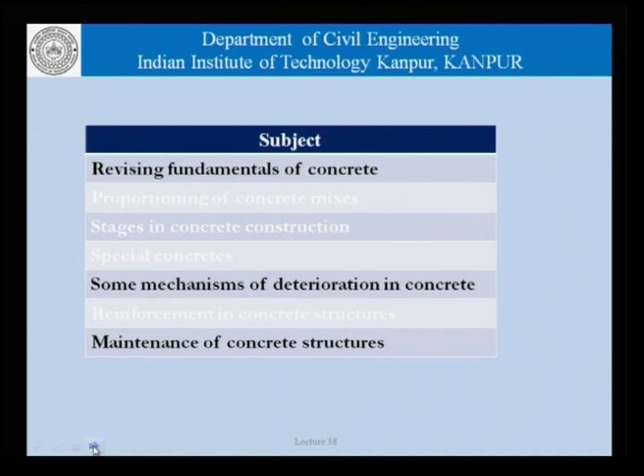We are trying to revise fundamentals of concrete, proportioning of mixes, stages in concrete construction, issues in quality control, talk about special concretes, some mechanisms of deterioration, reinforcement in concrete structures, and maintenance of concrete structures. In the last discussion, we were talking about a subject which spans fundamentals of concrete design, in fact the principles of all structural design as a matter of fact, mechanisms of deterioration in concrete, and maintenance of structures. What we were talking about was a conceptual framework for maintenance and repair of concrete structures.

So to recapitulate what we were trying to do, we had studied or looked at deterioration and performance and how they change over time. So this here is the variation of deterioration. As gradually the structure is in service for a longer and longer time, it deteriorates. Corresponding to that deterioration, the line here shows a change in the performance. Initially the structure performs very well, and as the structure ages, the performance tends to reduce or degrade. Taking these changes in mind, this green line here is the minimum acceptable level of performance, and this red line here is the maximum acceptable level of deterioration.

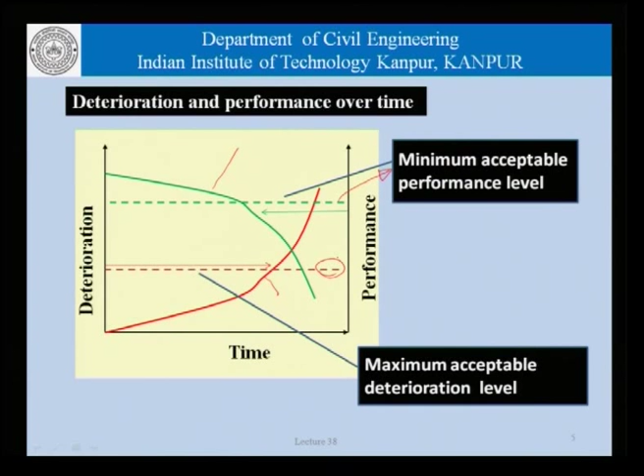And depending on how we want to define the concept of service life, we can say that the service life is reached once either the deterioration exceeds the maximum permissible limit or the performance falls below a critical minimum acceptable level. Now, how do we define these levels? In what quantitative parameters? That is left to us. We could choose parameters such as deflection for performance. We could choose cracking for deterioration, chloride penetration for deterioration, and so on and so forth. So as a concept, this is what we had talked about when we talked about in-service maintenance of concrete structures.

Extending this concept further, we discussed the issue of inspection, which involves determination of the actual state of the structure from the point of view of either deterioration or performance. So once the structure is put in service or just before it is put in service, there is an initial inspection followed by periodic inspections, and at the end of which we need to carry out an evaluation process and decide what we want to do, either reinforce the structure or at the end of any stage we can decide to repair the structure. This could be followed by a detailed inspection, which again could lead to a repair or a reinforcement. And at the end of this cycle, once we have carried out a repair or a rehabilitation, we really go back to an initial inspection and see whether the work that has been carried out is satisfactory and what is the state from which the structure is starting afresh.

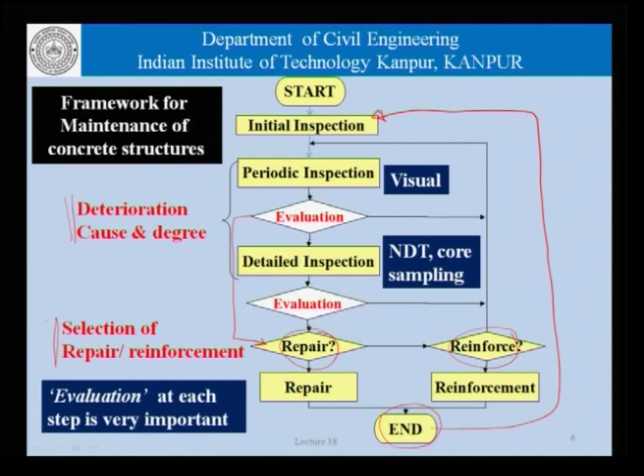While we are talking about this, we also talked about the need to understand deterioration and its causes when we are carrying out inspections, and the importance of selecting repair and reinforcement measures when we are carrying out repair and reinforcement. And of course, the issue of evaluation, which is really a judgment or a decision making process which is involved at different stages to help us determine the next step.

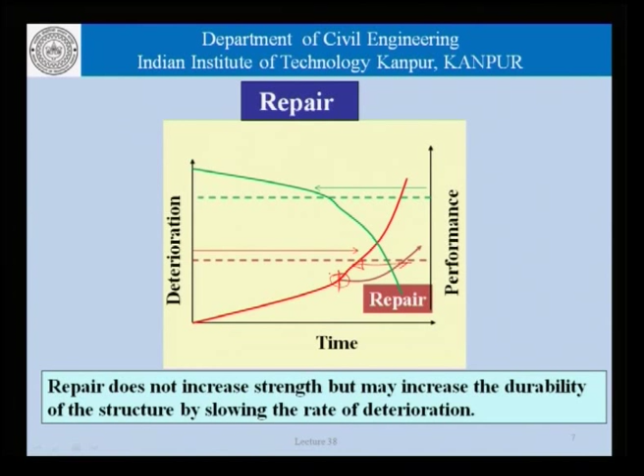Now, carrying this forward, we try to define the concept of repair in terms of a maintenance action which may not increase or improve the existing state of the structure, but increases the service life that is available to us by reducing the rate of deterioration that is occurring at that point in time. So, if we are intervening at this point in the structure, we have increased the service life by reducing the rate of deterioration or rate of further deterioration.

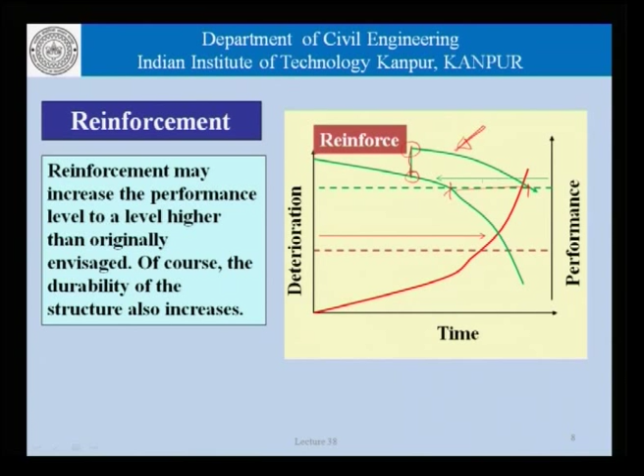Similarly, as far as reinforcement is concerned, if we are intervening at this point in time, we may actually improve the performance at that point in time, and how this graph, that is the post reinforcement change in the performance, goes would depend on the nature and the efficiency of the reinforcement work. So, we have increased the service life from this point to this point because of reinforcement action. So, this is what we had talked about last time. We had discussed in some detail the causes for repair and reinforcement action, considering a simply supported beam like this. One of them could be increase in the load level, which in civil engineering structures could arise out of changes in the axle load, the frequency of loads and so on.

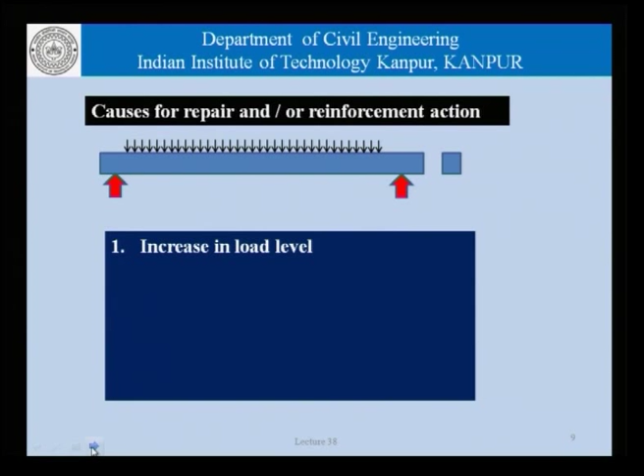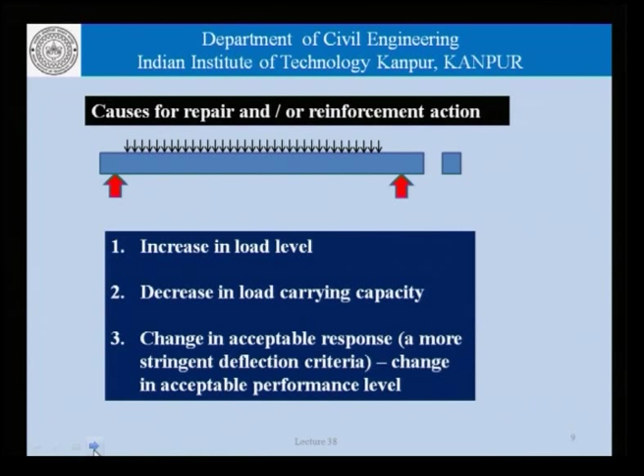It could be in the decrease of the load carrying capacity of the member or the structure, which is how the deterioration in properties of the material manifests itself. And there could be changes in the acceptable response or the change in the design criteria, acceptable deflections, for example, changes in the load factors and so on.

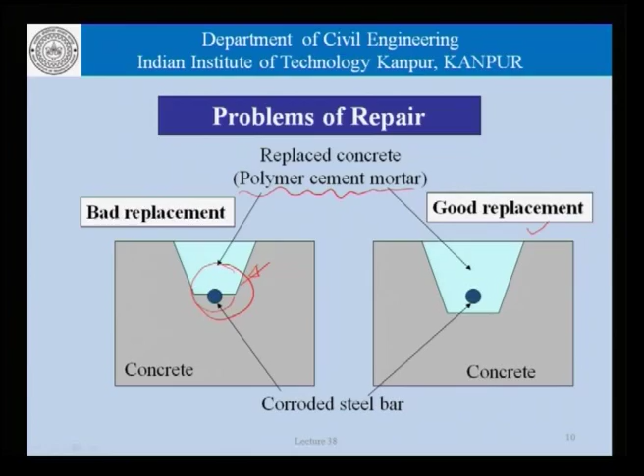We had talked about some problems in repair. We had talked about a bad repair, in which case we had seen that the repair material, for example, polymer cement mortar, is placed in a structure like this without removing all the concrete from behind the deteriorated reinforcement bar, which is what is done here as a good replacement. And a repair action of this nature does not necessarily mean that the structure will not corrode in the future. So, the corrosion or such a problem could manifest itself very quickly after the repair work has been carried out if the work is not done properly.

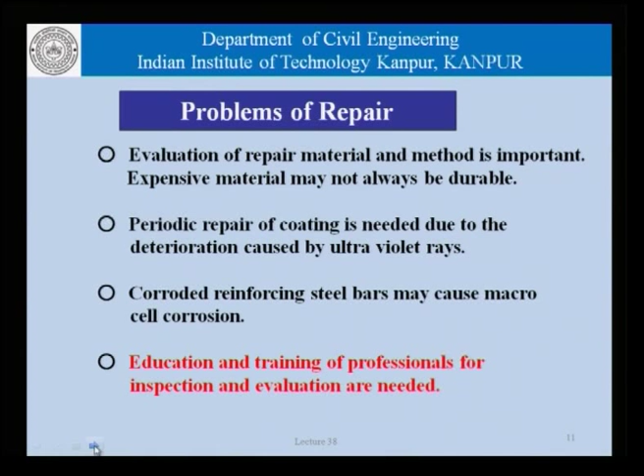We had talked about the need to evaluate repair material and the method. It is not necessary that expensive materials are always more durable. We had talked about periodic repair of coatings, because those coatings could be deteriorated or could lose their effectiveness on account of deterioration by exposure to ultraviolet rays. In cases of corrosion, we have to be careful about macrocell corrosion being initiated, and we have talked about macrocell corrosion when we were talking about deterioration in concrete structures on account of reinforcement corrosion, and the need for education and training of professionals for inspection and evaluation of concrete structures, which is a professional job. It just cannot be done in an ad hoc manner.

So, now coming to what we will talk about today, we will really focus on some of the common methods of repair and reinforcement, and we will quickly run through some results from a laboratory study on repair methods and their efficiency. Now, coming to some of the common methods of repair and rehabilitation, the discussion here is more in terms of introducing the repair methods rather than going into the details of each of these methods. And I would like the listeners and the students who are interested in this subject to actually go through the net and some of the available literature which describes each of these processes in much greater detail, and that perhaps is not required when we are talking about the general principles of repair and reinforcement of concrete structures, that too within a framework of operational maintenance and so on.

Now, the first such method that we talk about is the dry pack and epoxy bonded dry pack. What is done here is that we have a portion of the structure which needs to be repaired. So, what we put in place is a restraining formwork, and we try to pack the repair material in layers. So, we put this layer first, followed by another layer after that, and so on, and this compaction is carried out using a hammer. So, that is the manual method for placing, compacting and ensuring that this part of concrete which had been removed or which had to be removed on account of some reason is now replaced by another

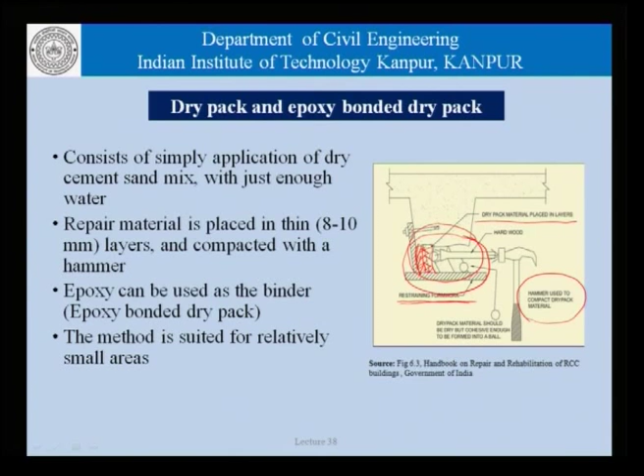The advantage of this method compared to using simply concrete to begin with would be that we do not really need to compact the concrete. It can be done in sections where concrete cannot be placed and compacted. So, we can use coarse aggregate, fill that space with coarse aggregate, and add the grout later on.

There are basic differences between pre-placed aggregate concrete and normal concrete. The way pre-placed aggregate concrete has been done, as you know, would involve aggregate to aggregate contact, which is not necessarily true when we are talking about normal concrete constructions. Similarly, the gradation of the aggregates that is used should be such that it allows the movement of cement grouts. We need to determine the properties of the grout that will be suitable for a particular application depending upon the maximum particle size and the particle size distribution, which would essentially control the void geometry of the compacted coarse aggregates.

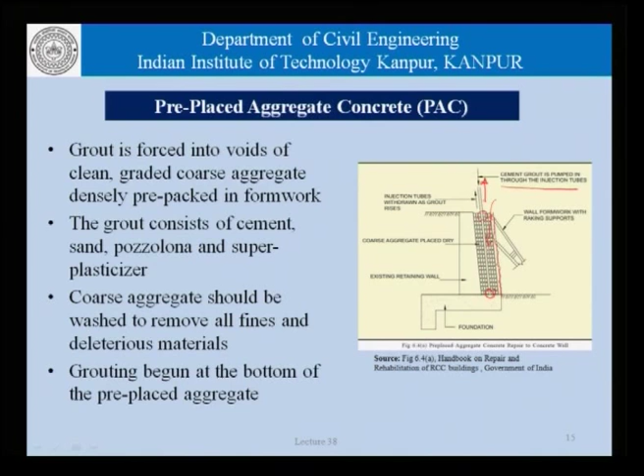So, grout is forced into voids of clean graded coarse aggregate densely pre-packed in formwork. It consists of cement, sand, pozzolana and superplasticizers. Coarse aggregate should be washed to remove all fines and deleterious materials, and grouting begins at the bottom of pre-placed aggregate. Obviously, we cannot start the placing of grout at the top and hope that the grout will simply flow down. It is better to start from the bottom and then go up gradually. These are some more pictures from pre-placed aggregate concreting operations.

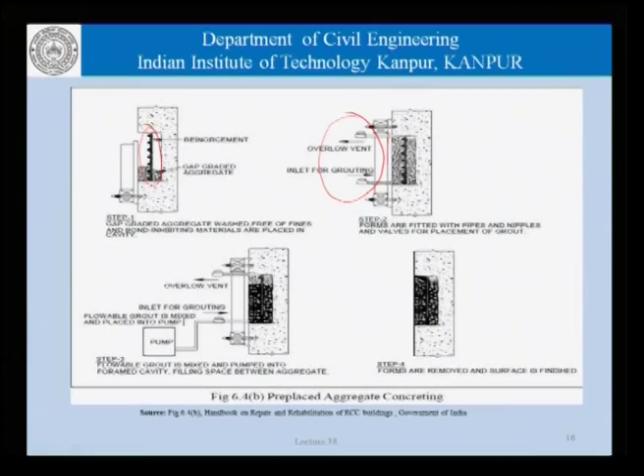So much for the pre-placed aggregate concrete operation. You can imagine that an actual placement of pre-placed aggregate concrete would be a lot more complicated, and the quality control even more so, because we need to understand the void geometry, the void configuration for a given mix of aggregates, and we need to choose an appropriate grout from the point of view of the viscosity, the segregation, bleeding, strength, and so on.

Continuing our discussion with methods of repair, shotcrete is another candidate, and we have talked about it earlier when we were talking about special concrete. There could be wet mixed shotcrete and dry mixed shotcrete. In the dry mixed shotcrete, the water is added just before the material is shotcreted onto the surface, and the method is also called guniting or pneumatically applied concrete or mortar, as it involves deposition of material in layers under pressure without supporting formwork. And this part limits its applications.

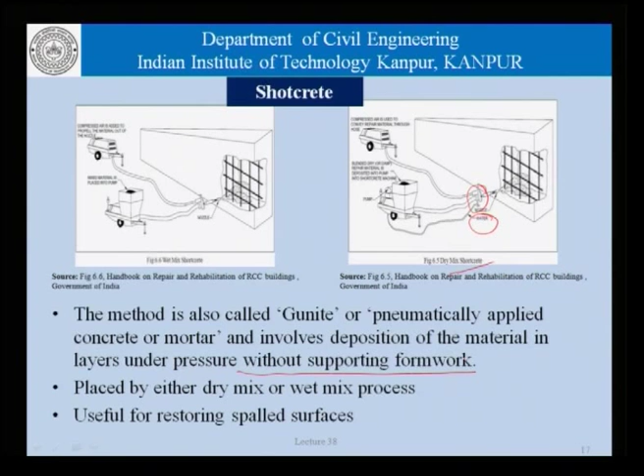Of course, as a repair method, it is a very powerful method because material can be deposited in layers. It can be done by the dry or the wet mix process, and the method is particularly useful for restoring spalled surfaces. If we have a surface where the concrete has really fallen off, then shotcreting or guniting or placing concrete under pressure is a very viable alternative. This is quite different from having to place the concrete manually in that area.

Now, let us talk about another method which is quite different, and that is plate bonding. Now, this consists of connecting mild steel plates to concrete surfaces mechanically by bolting or gluing with epoxy. As we can see here in this picture, fixing of plates on the concrete surface would enhance the flexural strength, and the plates can be held in position by either bolting them to the concrete or fixing them using an epoxy. So, what primarily is being done is that we have

What we have in this method is that if we have a concrete beam which has deteriorated, what we want to fix is a mild steel plate here, and then if we apply load on this beam, this plate takes all the tension.

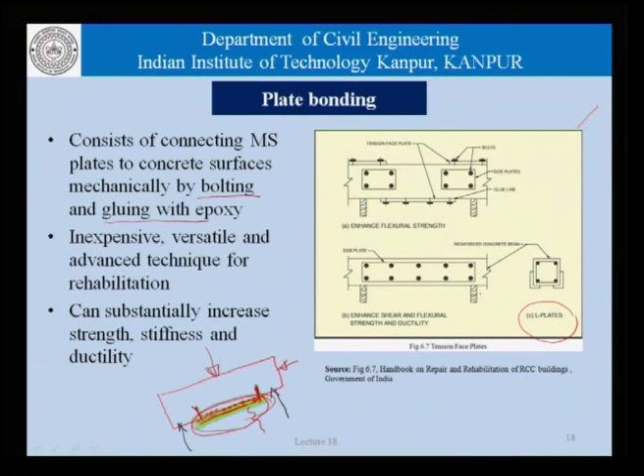And we have a steel plate which has been placed here for the tensile face. We can place these plates even on the shear faces and so on. This is an inexpensive, versatile and advanced technique for rehabilitation, except that we should know how to design this method. We should know what is the kind of plate to be used, what is the size of the plate, what is the size of the bolts, or what is the kind of epoxy or glue which has to be used at the surface in order to ensure monolithic structural action, but it can substantially increase strength, stiffness and ductility of the repaired structure. We could even use L plates if we want to use in a beam or a column.

Now, let us talk about jacketing. Jacketing really means an existing concrete around which fresh concrete is placed. So, that is a concrete jacket, we call it RCC jacket, means a reinforced cement concrete jacket is placed around a concrete which could have deteriorated, in which case it could be a repair action without an intention to increase the load carrying capacity or the performance of that column or that structural member, or it could even be a reinforcement step where we want to actually increase the cross section of that particular structural member.

So, what is being done is that we add stirrups which are welded, we add longitudinal reinforcement, and this longitudinal reinforcement is anchored in the existing concrete somehow with a resin mix, and we finally concrete the outside surface. And this can be done either by normal concreting, that is placing the formwork and pouring the concrete, compacting it and so on, or it could be done by shotcreting, or it could be done by pre-placed aggregate concrete. The idea being that there is reinforcement outside an existing structure and a concrete covers that to increase the cross-sectional area or keeping the cross-sectional area the same and so on.

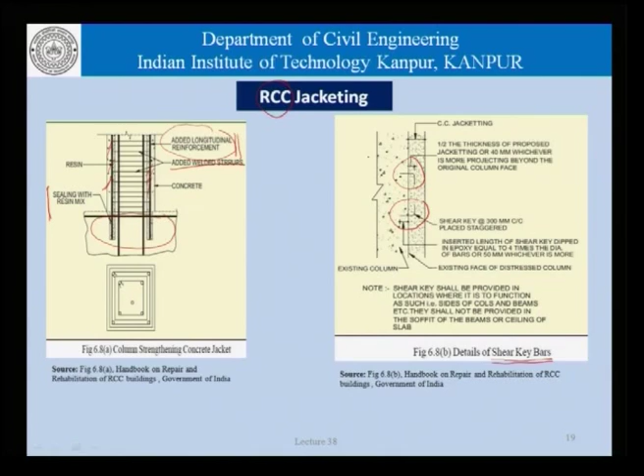When we are doing jacketing, we need to be especially careful about the need to provide shear key bars, and these shear key bars are bars like this, which are provided to ensure that the newly added material, that is the jacketed concrete, becomes monolithic with the existing concrete.

Now let us talk about stitching. Suppose we have a crack like this in a structure. One of the options available to repair this crack or prevent this crack from spreading, either lengthening or increasing in width, would be to stitch it. Now how do we stitch it? We mark and drill holes on both sides of the crack, that is here and here across the crack, chase a groove between the drilled holes, so we make a chase or a groove across this crack like this, insert a U-shaped MS bar in the holes that spans the crack and grout this on either side and fill the chase.

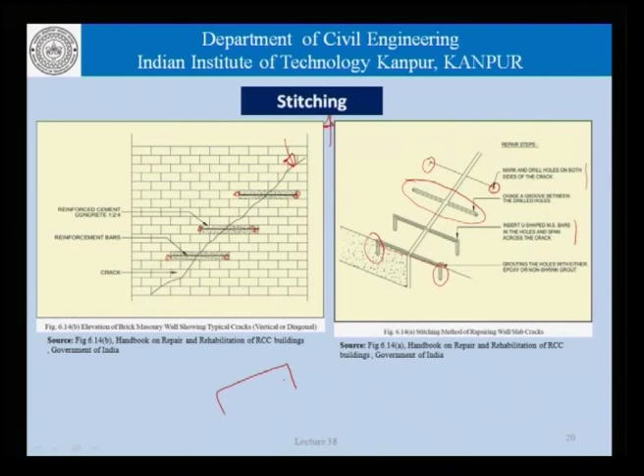So what has happened is that this crack now has these U-shaped clips or MS bars which are spanning the crack. Now as the crack tries to move, it has to cause failure of these clips before the crack can move. So effectively these MS rods or clips serve to arrest any crack growth, because the steel is not so easy to fail. It is not so easy to apply enough stress on the steel to fail. Steel is a fairly high strength material. As far as filling of these grooves is concerned, we could do it with mortar, we could do it with concrete, we could do it with epoxy concrete, whatever we want.

Now let us talk about a fiber wrap. Now fiber wrap is basically another form of jacketing, where the deteriorated concrete here is wrapped with fiber. So it is a non-intrusive strengthening to increase the load carrying capacity with minimum damage to existing concrete. Several layers of bidirectional woven material or woven fabric is held together with an appropriate resin. So it is not a single material here, or it is not a single layer of fiber, it is several layers of bidirectional fibers woven and held together with an appropriate resin.

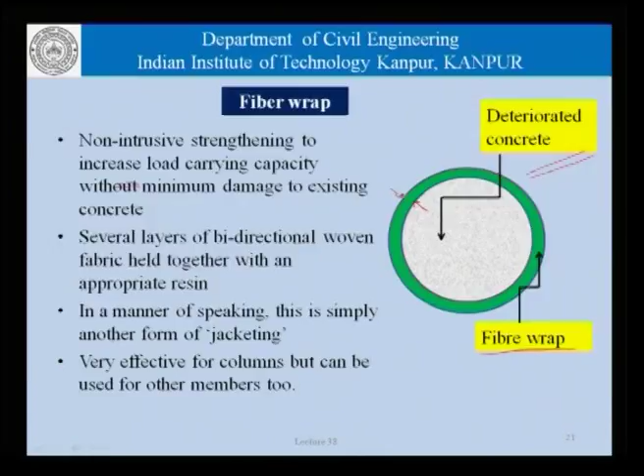And in a manner of speaking, as I said, it is just another form of jacketing. So instead of a reinforced concrete jacket, we are placing an FRP jacket on a deteriorated concrete member. It is very effective as far as columns are concerned, but it can also be used for other members. You will recall that we had some discussion on use of FRP materials for repair and re-strengthening of concrete members or deteriorated concrete members when we were talking about the applications of fiber reinforced plastics in civil engineering construction.

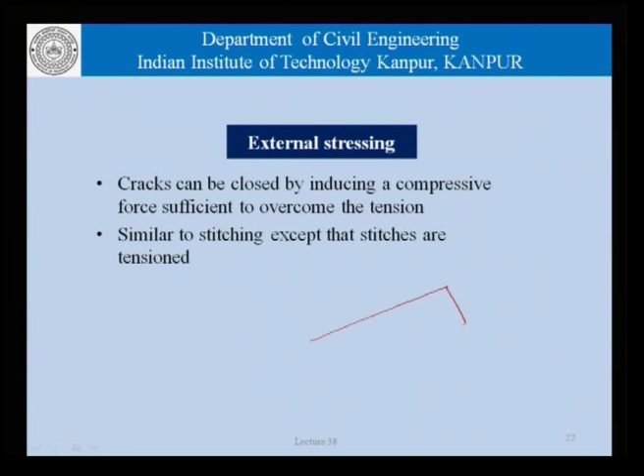And now coming to perhaps the last basic method for repair of concrete structures that we are talking about today, we come to external stressing. Now what is external stressing? We must remember that cracks in concrete can be closed by inducing a compressive force which is sufficient to overcome the tension which has caused the cracks. So basically, if we have a concrete member with cracks like this, if we apply a sufficient compression on the concrete as shown, the chances are that we will be able to close these cracks.

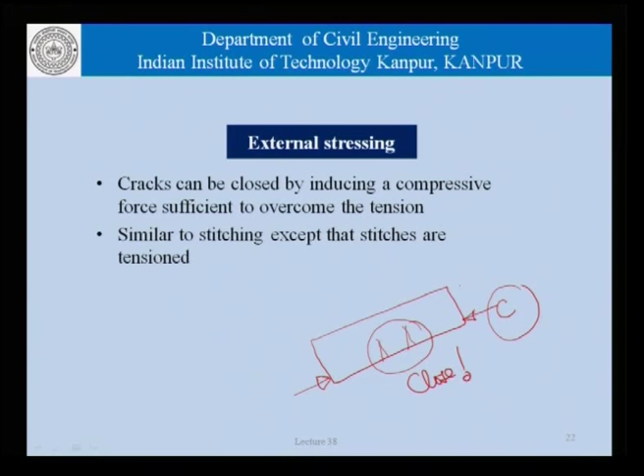And once we are able to close these cracks, half of our battle as far as reducing the rates of deterioration has been won, because these cracks are not only maladies from the structural point of view themselves, but also provide easy ingress to deleterious materials such as carbon dioxide and air, water, maybe chlorides into the concrete, and that accelerates the deterioration process. If we are able to close these cracks, we would at least be able to slow down the ingress of these materials into concrete. And how can we induce this kind of compression is what we get when we externally stress, or this is what is called external prestressing, out cable prestressing.

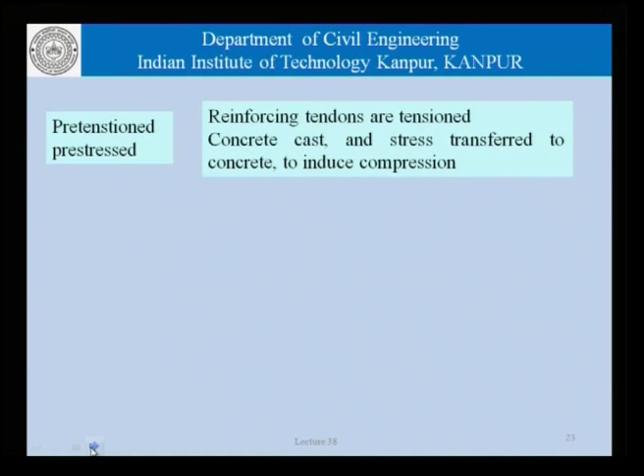Now, without getting into the details of this out cable prestressing, because we have talked about it earlier in this course, we will just recall pre-tensioned prestressing, where reinforcing tendons are tensioned in stage 1, concrete is cast and allowed to harden, and then the stress is transferred to concrete to induce compression. As contrast to post-tensioned prestressed systems, where concrete is cast normally, leaving ducts within, tendons are placed within these ducts and tensioned after curing of concrete, and once the tension is removed using appropriate anchors at the ends, the concrete is placed in compression.

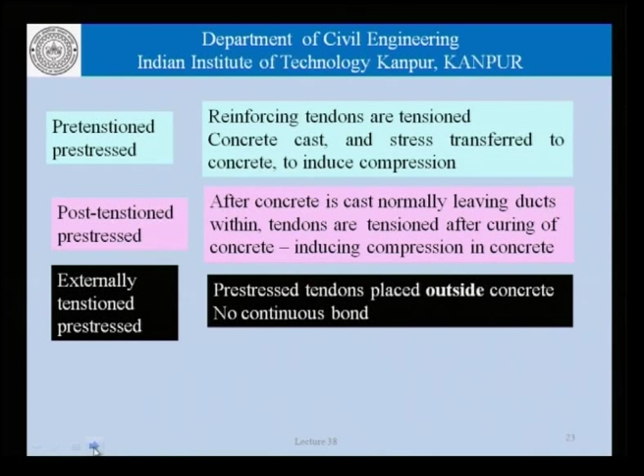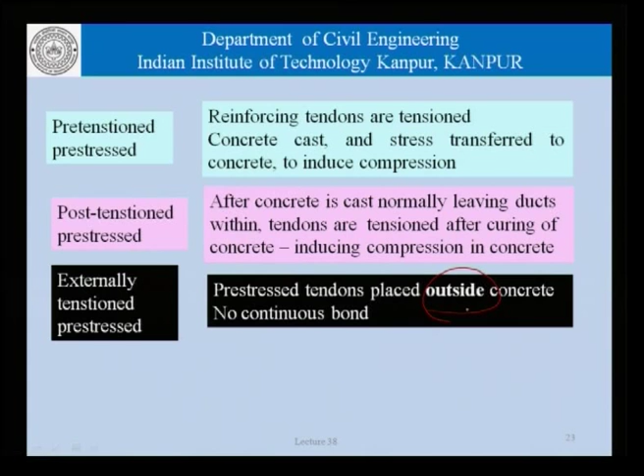Externally tensioned prestressed systems, which are of interest to us now from the point of view of repair and rehabilitation of structures, is a system where prestressing tendons are placed outside the concrete and there is no continuous bond. Once these tendons are outside, of course, they have the merit that any problems in terms of maintenance can be actually monitored at the points of anchorages, the points of supports, the tension in these tendons and so on.

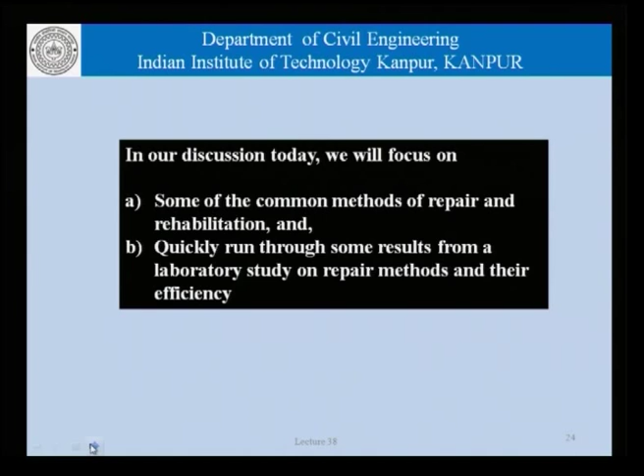So, what we had said at the outset today, that we will focus on some of the common methods of repair and rehabilitation, is something which we have now completed, having gone through a variety of methods which are used or can be used in concrete structures apart from simple methods such as impregnation of cracks, application of coating, placing an overlay and so on. We have not gone into the details of these methods, we have not gone into the design of these methods, and that is something which is very, very important.

One can imagine that each of these methods has structural implications. When we are talking about a fiber wrap, when we are talking of RC jacketing, when we are talking of MS plate bonding, they tend to alter the structural behavior of the members and therefore the structure. So, any such method, the use, what kind, what time, what nature and so on, must be decided by a structural engineer or in consultation with a structural engineer who should assess the implications of carrying out this maintenance action on the behavior of the structure.

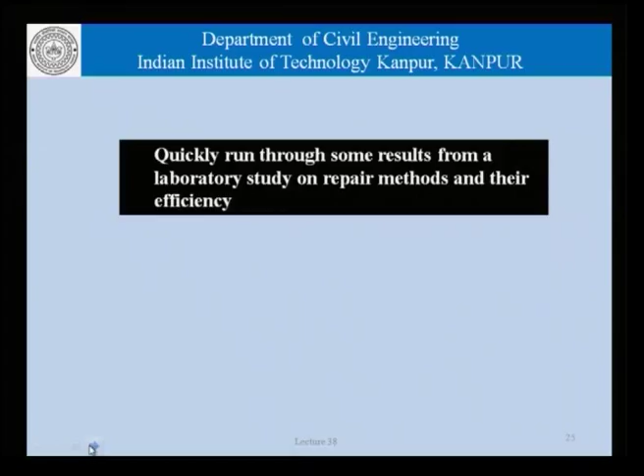Now, having said all that, let us quickly run through some results from laboratory studies on repair methods and their efficiency, which will give you an idea as to what is the kind of work that needs to be carried out from an engineering point of view to better understand the different materials and their efficiency as far as repairing and reinforcement of concrete structures is concerned. What we will talk about is two studies.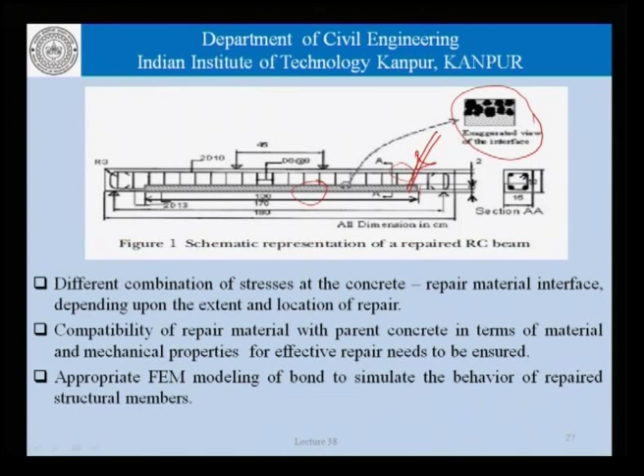So, compatibility of repair materials with the parent concrete in terms of material and mechanical properties for effective repair needs to be ensured. And of course, once we have the basic properties with us determined experimentally, we could use finite element methods or any such program to simulate or analytically examine the behavior of a repaired concrete beam.

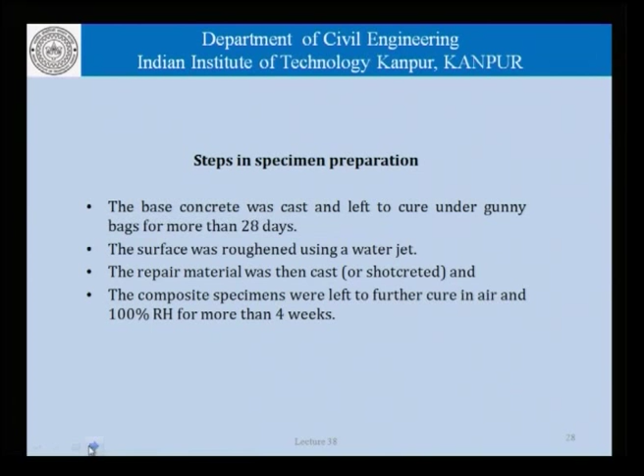Now, as far as the steps in the specimen preparation are concerned, there is the base concrete which is cast and left to cure under gunny bags for 28 days. The surface is roughened using a water jet. Repair material is cast or shotcreted, with the composite specimen being left to further cure in air for another 4 to 7 weeks. And in this case, different tests were carried out.

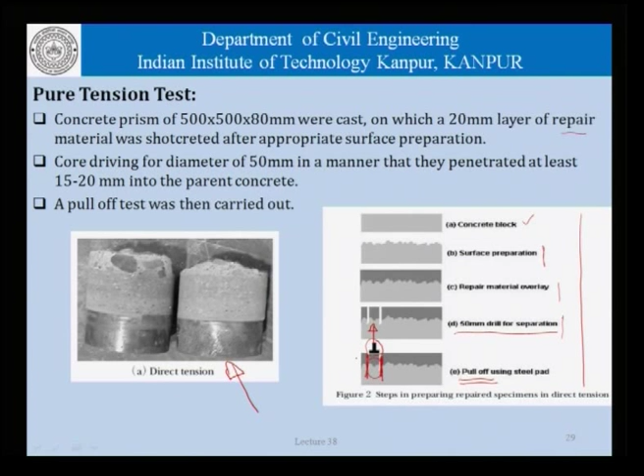For the pure tension test, this here outlines the basic process: casting the concrete block of 500 by 500 by 80, on which a certain layer of 20 mm of repair material is to be placed. The surface preparation is carried out, repair material is overlaid, and a drill is used to create a specimen which is shown here, and then we carry out a pull-off test. A pull-off test really means fixing a fixture on the surface and trying to pull it off, trying to ensure thereby failure in this small neighborhood, whether the failure occurs within the repair material or at the interface or in the concrete. So, now in order to do that, this depth that we make as far as the coring is concerned is fairly important, and this here shows a failed specimen.

As far as a direct shear test is concerned, a concrete prism is cast, the concrete from the middle is removed, and we carry out an appropriate exercise as far as the surface of the concrete is concerned, cast the repair material here, and then finally subject the specimen to shear.

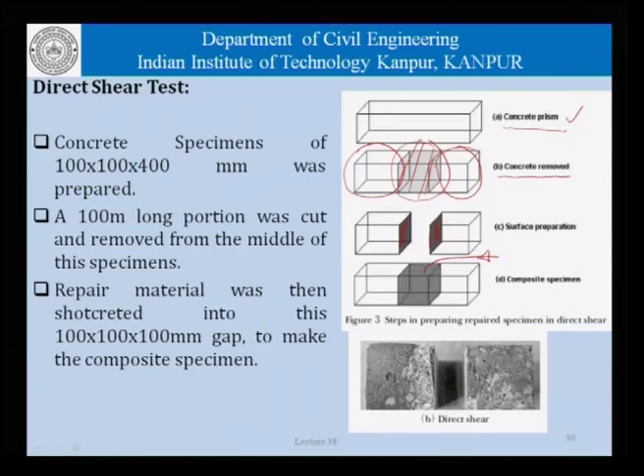It should be remembered that this process of casting the concrete prism and then removing the concrete is not the same as casting this block of concrete and this block of concrete first and then placing this repair material within. The reason for that is that in case we cast the concrete and then just place the reinforcing material and then place the repair material within that block, we would not be doing any surface preparation of the concrete. The concrete at the surface would not be really the same as the concrete that we would get after removing the concrete which is originally cast. So, these are some fine differences or points that one must remember when we are doing an experimental work. We must try to simulate the actual or the field conditions to the extent that is possible.

When it comes to a combined shear and compression test, a cylindrical specimen 75 millimeters in diameter and 150 mm long was prepared. The cylinders were cut at a slope of 30 degrees to the longitudinal. After whatever surface preparation had to be done, the cylinders were recast using the repair material.

So, we cast the cylinder here, remove part of this cylinder, and then fill this part with the repair material and test this composite cylinder and see what happens at the interface as far as failure is concerned.

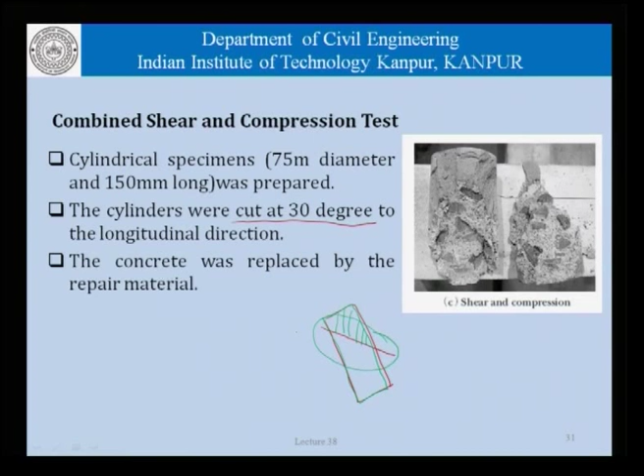These are some of the results which have been obtained from the pure tension, pure shear, compression and shear values for different surface preparations. The values are different, and of course, these are the results for the compressive strength, Young's modulus, Poisson's ratio and the tensile strengths of the individual concrete and the repair material. So, you can see that the compressive strength of the repair material per se is much higher than that of concrete, but the Young's modulus, the Poisson's ratio and the tensile strengths are not so much apart.

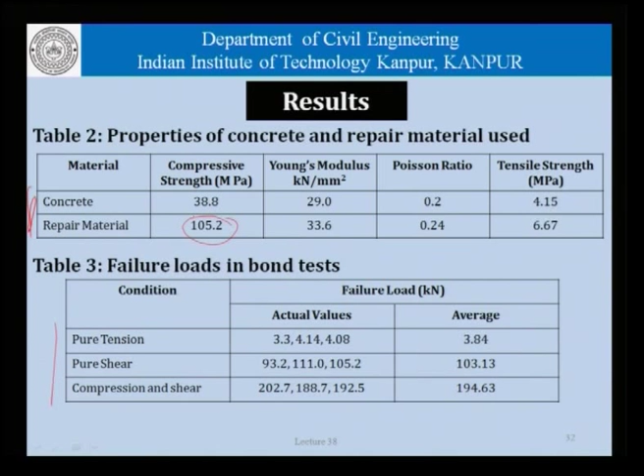Now, coming to another experimental work which was an extension from the previous one where we studied the interface. This one was behavior of repaired RC beams under cyclic loading, and this was also published in the Seisan Kenkyu. Here 8 beams were repaired and non-repaired control beams were there, and they were subjected to fatigue, that is repeated loading. We used 2 repair materials and the beams were repaired over a length of 80% of the span.

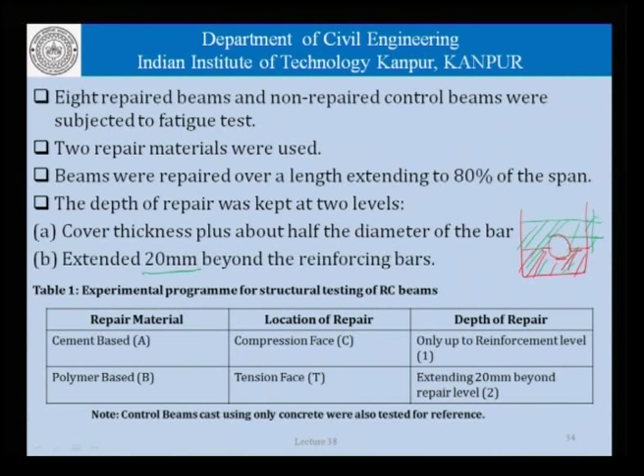The depth of repair was kept at 2 levels, the cover thickness plus about half the diameter of the bar, and in another case the repair thickness extended 20 millimeters beyond the reinforcing bars. Now, this is similar to the kind of discussion that we had earlier about a good repair and a bad repair system. In one case, if this is the bar, the repair material was cast up to this point, which is the cover depth plus half the diameter of the bar. In another case, the repair material extended all the way beyond to the extent of 20 millimeters behind the bars. And as we said, there were 2 repair materials used, one was cement based and the other was polymer based.

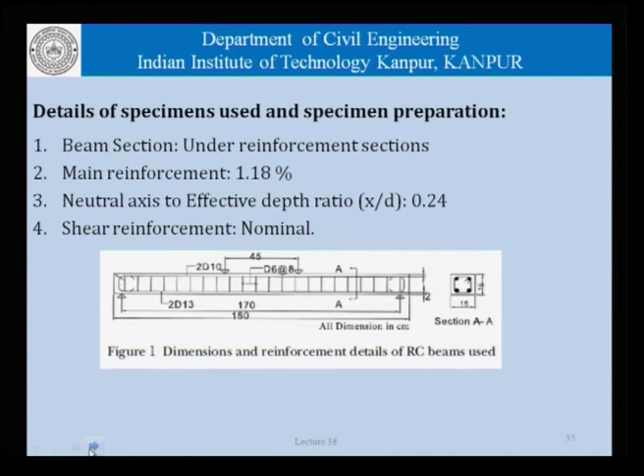This is a typical sketch or a diagram which shows the dimensions and the reinforcement details of the reinforced concrete beam used. The beams were all under reinforced with the main reinforcement of about 1.18%. The x by d, which is the neutral axis to the effective depth ratio, is about 0.24. Nominal shear reinforcement being used. These beams were finally tested for fatigue.

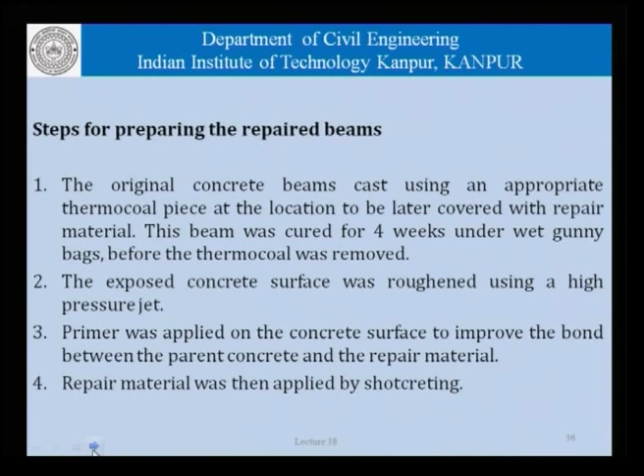The original concrete beams were cast using an appropriate thermocol piece at the location to be later covered with repair material. This thermocol piece was obviously removed at the time of placing the repair material. The beams were cured for 4 weeks. The exposed concrete surface was roughened using a high pressure water jet, and primer was applied at the concrete surface to improve the bond between the parent concrete and the repair material, and that is typically done even when we are carrying out the repair and reinforcement work in a site. And the repair material was applied using shotcreting, whether it was cement based or it was polymer based. In this case, the repair was done using shotcrete.

4-point loading test was carried out using an a by d ratio of 5.1. The upper and lower limits of fatigue cycle test were set at 20 to 75% of the maximum static load, and the frequency of load without load reversal is 1.5 hertz. So, this really describes the fatigue test.

Without getting into the details of how fatigue tests were carried out or how they should be carried out, let me just explain the principle of a fatigue test here. When we are testing a reinforced concrete beam in static loading, forget about fatigue loading. If it is static loading, what we do is keep increasing this load till the beam fails. Now, in a fatigue load or a repeated application of load, we increase the load to a certain level and then cycle it the way it is shown. Now, this level, which is the maximum load level, has been kept at 75% of a static load carrying capacity

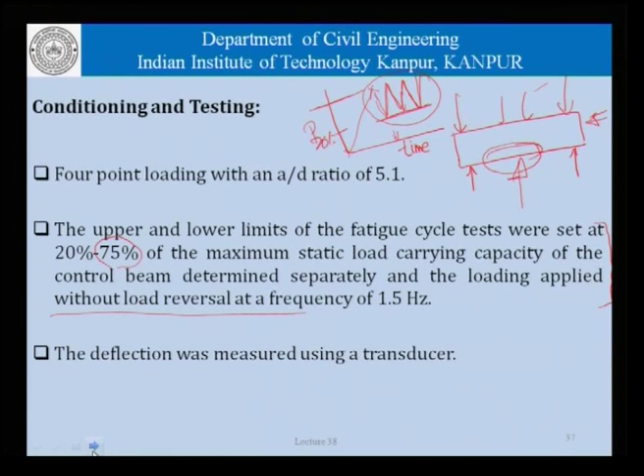The deflection, as we were performing these tests, was also measured using normal transducers, and this here gives us the cycles to failure as far as the different beams are concerned. This is in thousands, so if you add another 3 zeros here, 1.297 or 1.3 million cycles for the control beam. This shows the number of cycles at which the beams failed, and this gives us the percentage of the fatigue life of all these beams. Now, we will not get into the details of the discussion, but we must note that the values range from 18% or 18.8% to situations where the beam has actually become stronger than the control beam.

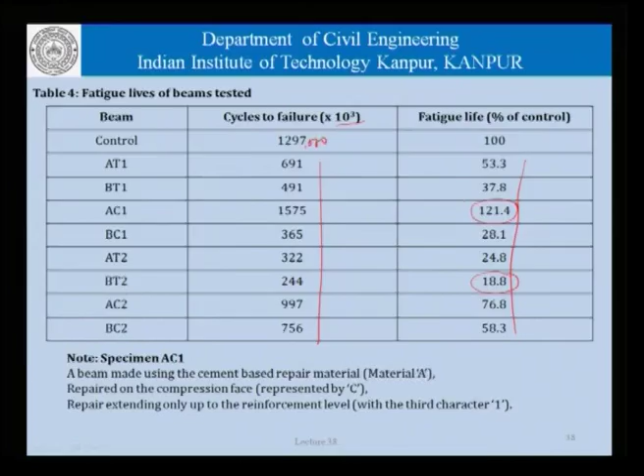One must remember that these are, after all, only single beams that have been tested, and that is something which I wanted to flag to you: the importance of actually carrying out more tests in number, so that we are more confident about the repeatability of those tests and the reliability of the results that we obtain. Except that in the case of fatigue testing, to get even 1 point takes a long time. If we are testing at 1.5 hertz or 1 hertz and the test goes on for a million cycles, I would leave it to you to estimate how much time has been spent when that beam and all that experimental apparatus has been occupied applying the load on the member.

And in order to carry out 7 or 8 tests to better understand the different materials that are being used, their efficiency and so on, it is a very, very time consuming exercise. It takes not only time, but all kinds of other resources. That is why it is important to understand the material behavior and the interface behavior in terms of numerical models supported by experimental results, so that the basic design can be carried out based on the analytical results with only a few points on the periphery or benchmarks being established using experimental results.

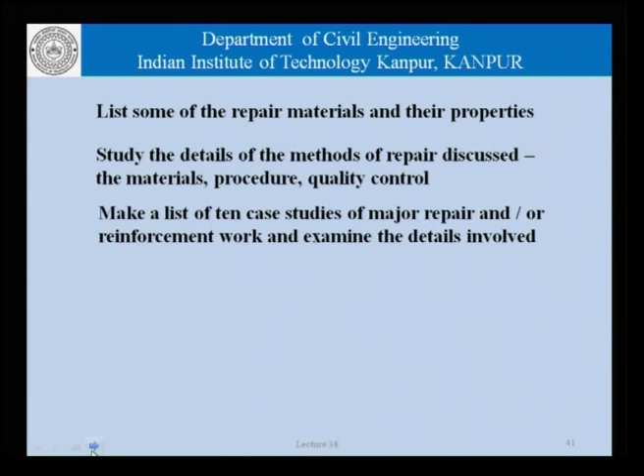And as is usual, before we finally close the discussion, let us take some things back home. List some of the repair materials and their properties, and how the properties affect the interfaces. Study the details of the methods of repair discussed, the materials, the procedure, quality control, whether it is fiber wrap, whether it is MS plate bonding, whether it is RC jacketing and so on. You could make a list of 10 case studies of major repair and or reinforcement work which are reported in literature for different bridges, for different buildings, and examine the details. There are case studies where crack injection and repair has been carried out on large dams. We could get information about the design guidelines available for repair and rehabilitation work.

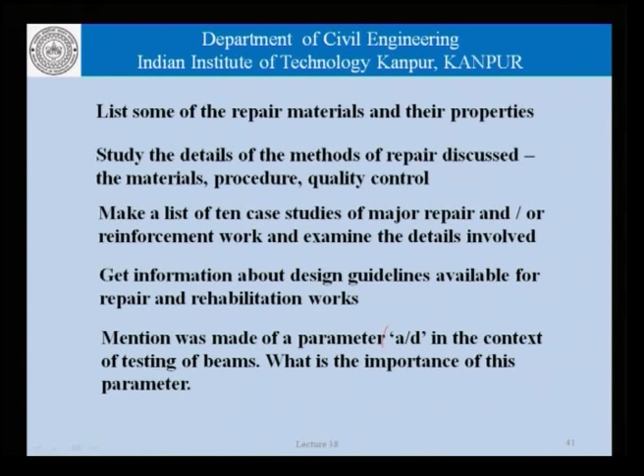And lastly, mention was made of a parameter called A by D in the context of testing of beams, which were being tested for repeated loading. What's the importance of this parameter? If you would remember, the value that was used in the present study for A by D is given as 5.1. Now, what's the importance of A by D and why one should use numbers greater than 5 when we are testing reinforced concrete beams is something which you can think about.